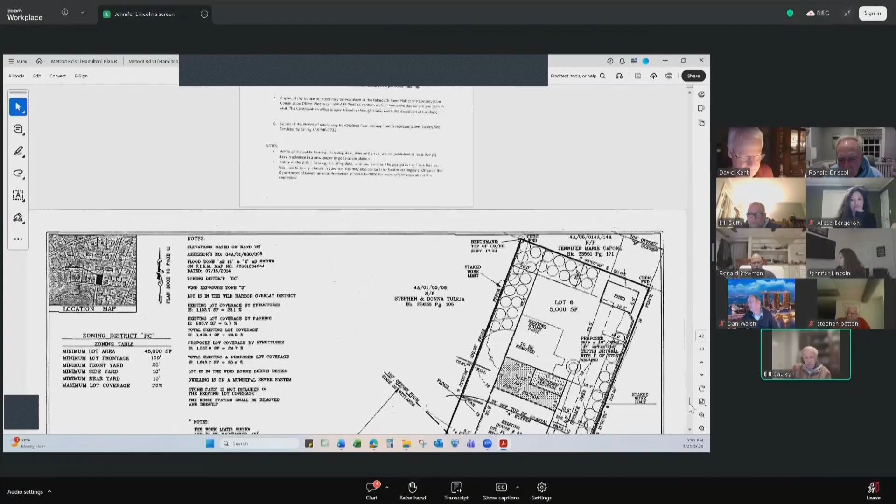Also, as far as the proposed addition, it's 77 square feet that we allowed 2-to-1 mitigation on because it's in buffer B. So a total of mitigation was 1,090 square feet that we proposed. The only place we could put it was along the east side because we still have to maintain 10 feet from the house. So we put the mitigation along the east side of the lot and then onto the northern and western area of the lot.

We added dry wells in to capture water runoff because currently it just drains down. So the feeling is by adding in the dry wells to capture all the roof runoff, we're actually helping the lot in the sense that now it won't adversely impact the salt marsh across the street from any type of runoff. We're capturing it all.

I believe we've addressed all the major issues as far as this project is concerned. It was brought up that we have changed some plans, so we'll provide another mitigation plan. But I believe we've addressed all the issues that need to be. Thank you.

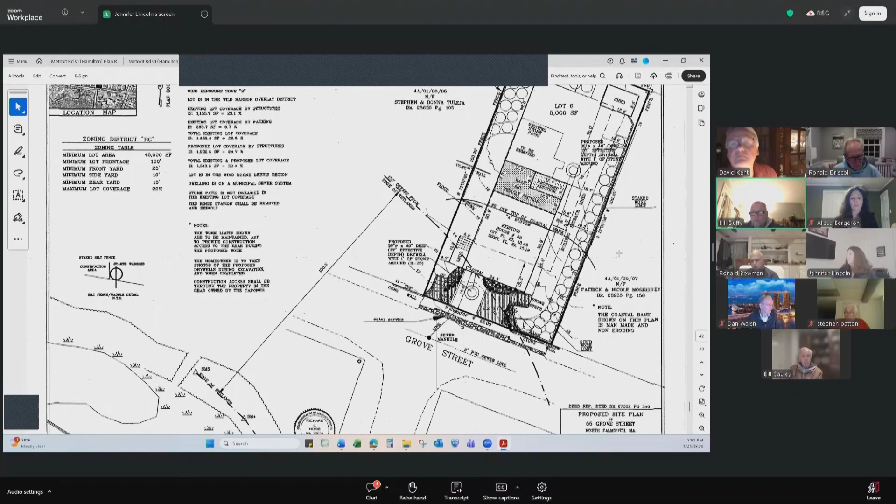Thank you, Mr. Cauley. Any questions? Jen, I think you can stop sharing. Perfect.

Any comments? Only that we want to switch out some of the mitigation for grasses, not shrubs. Correct, yeah, the three you mentioned: aster, goldenrod, and blue stem. Yep, we'll switch those out. We'll work with Bill to switch up his plan, but other than that, I don't believe we have any additional concerns. Perfect. Alyssa, anything from you?

Perfect, all right, commissioner comments. Ronnie, any questions? No. Ron? No, I'm all set. If we're all set with the plantings, it's a tight spot, there's not much you can do. Good to work it out.

Thanks, that's all. Steve? Steve, you're muted, Steve, you're muted. I don't have any questions. Thank you very much. Alrighty. Dave? I'm all set, thanks.

Dan? I only have one. I think I read in the really lengthy description of the project that the mitigation was only going to be managed for one season. I thought we were trying to do multiple seasons on things, unless it's already been addressed in other discussions. I think that's what it says in the document.

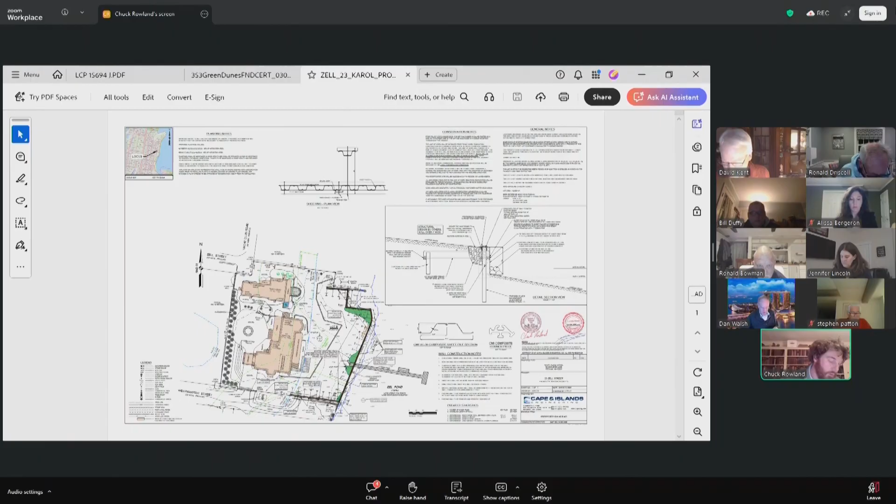I believe I have before you a fairly simple project, and as I talk about it, I'll be zooming in on different parts of the plan. The proposed project includes the reconstruction and maintenance of the existing stone and concrete bulkhead seawall with a vinyl sheeting seawall, as well as the expansion of the bulkhead along the southern extent of the property.

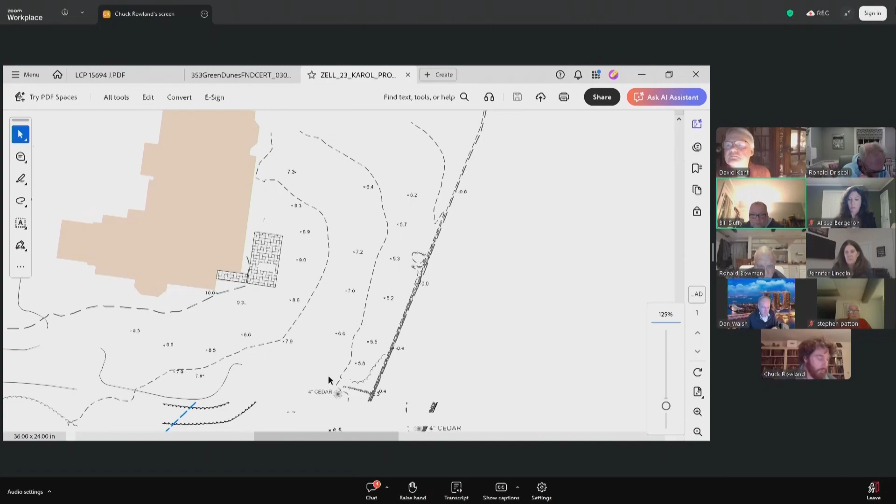And zoom in to show that. So this is the 72-foot return along the southern extent of the property.

The existing wall currently serves as a structural bank and provides critical erosion control and storm damage protection for the property. The bulkhead is showing signs of deterioration and failure, and to prevent the structural failure of the wall and protect the property from the effects of storm damage, the wall needs to be replaced before it experiences total failure.

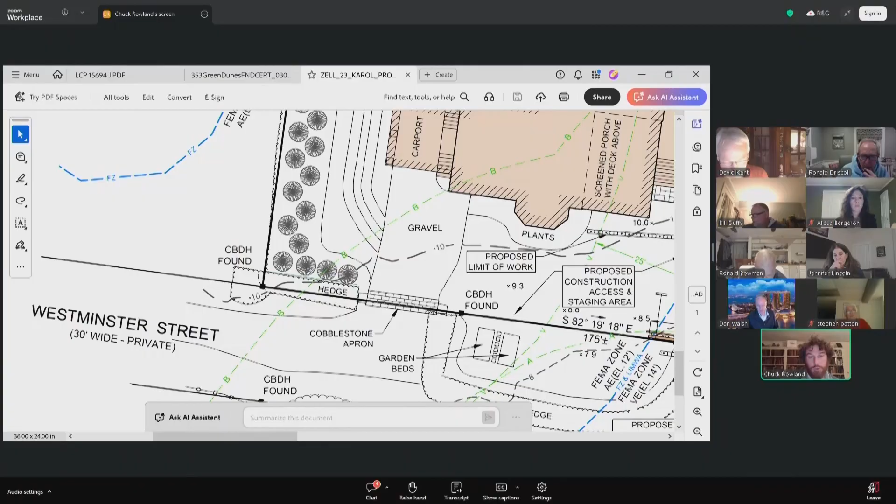All the proposed work will take place from the landward side of the seawall within the work limits. I've provided a work limit down Westminster Street through our property using the existing curb cut, and I've provided a work limit to limit the expansion of construction from expanding too far onto the property. We'll be using this for staging and construction access for all the work.

The concrete and stone wall will be removed in sections and methodically removed with an excavator. Care will be taken when removing the sections of the concrete to minimize any disturbance to the resource areas. The vinyl wall and dead men will be placed in the same footprint as the existing stone and concrete, except for the southern expansion, and will be driven into the ground with a vibratory hammer.

The existing bulkhead not only serves as a structural bank that provides erosion protection for the adjacent resources, it is assumed the bulkhead has not been replaced since it was constructed in the 1980s, and the structure will be built mostly in the same location except for the southerly extent.

And the wall is generally being replaced at the same height. As I said before, all the work will be done from the landward side of the property. At no point will construction activities or material storage occur on the seaward side of the wall. Access would be through the driveway, as I said.

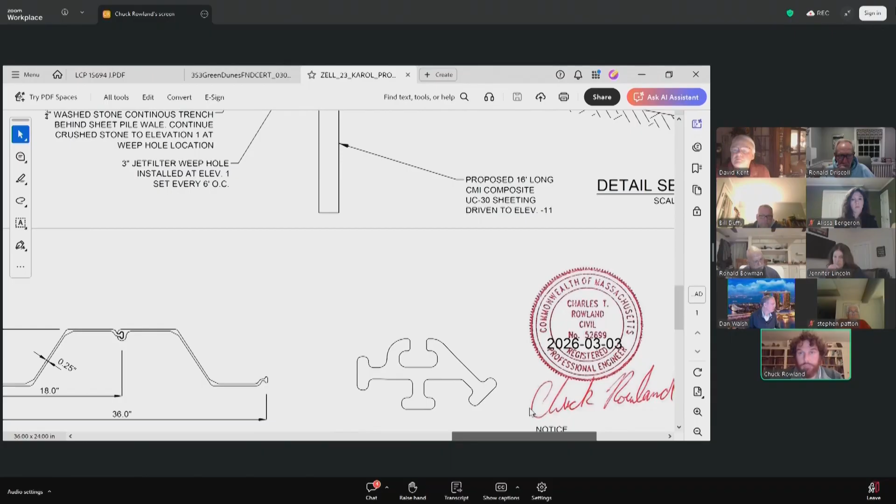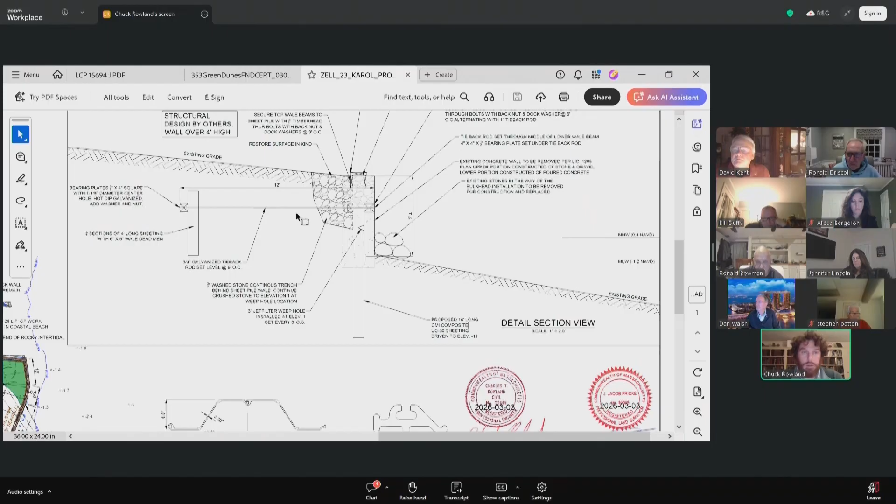I'll just run over the cross-section detail. I actually have a typo in the narrative - it's not vinyl, it's composite, which is a much stronger sheet. So I've shown the sheets to be driven or vibrated in after the existing wall has been removed. We're showing tiebacks that come back 12 feet.

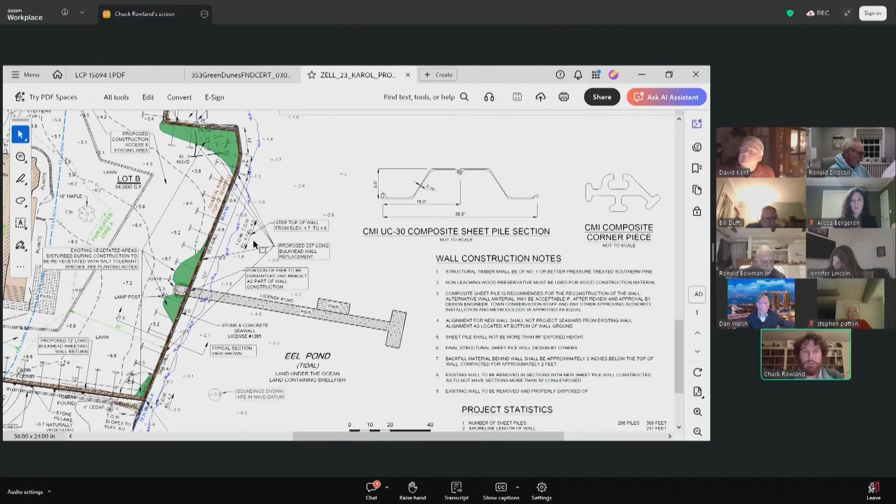We think this wall is going to be a much better option than the existing stone and concrete. Generally, stone and concrete nowadays really can't be constructed efficiently, and I have yet to find a contractor that's willing to install it and warranty the work.

I can run over some of the concerns that the staff came up with. Aerial photos show the vessel storage on the coastal beach. This can no longer be stored in the resource area - we're fine with that. Staff recommends the Rugosa Rose be reinstalled on site.

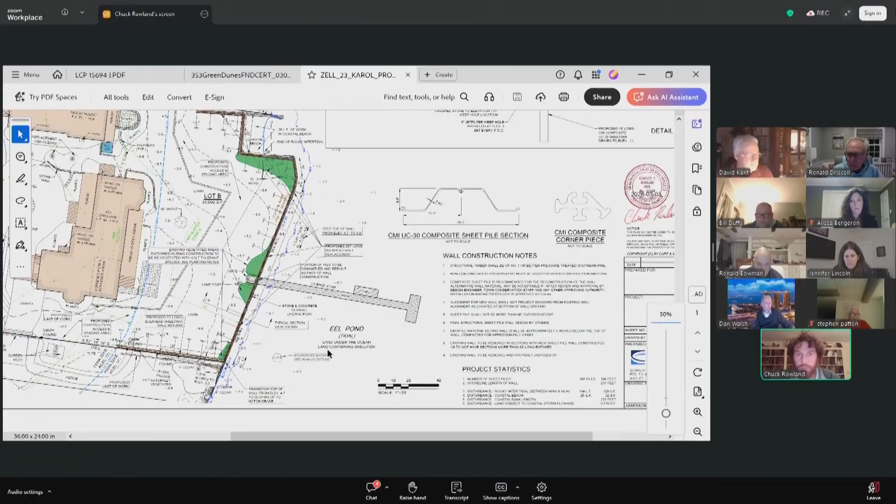Also, the restoration areas can be reconfigured in Zone A. If preferred, staff can review planting areas on an updated survey. Obviously, we'll be okay with staff's recommendations for plants in those areas that I've marked. I think I stuck with beach plum and another saltwater tolerant one, but we're happy with whatever staff recommends.

As for the gravel driveway, it's commented that there was an alteration in about 2017, and this can be approved after the fact, given the area is solely located in the AE flood zone. I'm assuming that means it's getting approved under this filing, but I guess Jen or Alissa can comment on that.

And then the big comment is how the removal of the existing wall is going to impact the integrity of the wall portion to remain in the road layout. And I can actually go over that real quick.

After this comment, and I think it's a very good question, my understanding was that it is a structural standalone wall, and that's a hard analysis to come up with without doing something like ground penetrating radar to figure out what kind of wall it is. Even then, it's hard to say what the integrity of the concrete and stone is in that area.

There is a return that we showed here on our survey, and I actually took a photo of it. It's hard to say how that is tied in or the structural capacity of that return.

So one of the thoughts I had is that we would send a tieback in around this area of the cedar. We'd have to get a small machine in here to dig this area out, and then we could drill a 2-inch hole through the concrete wall and put a large steel plate on the seaward side of the wall and tighten it all up with a turnbuckle. That'll ensure that this end of the wall will be stable.

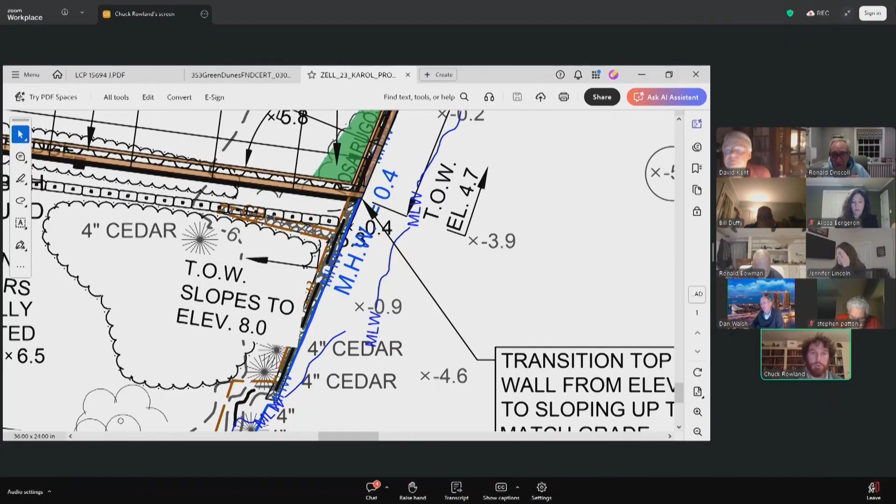My suggestion would be to place it on the southerly side of this return so we don't have to disturb it. Obviously this will add disturbance to this native area, but we're happy to revegetate it afterwards if that's what you guys agree would be the best solution. So with that, I'm happy to take any questions.

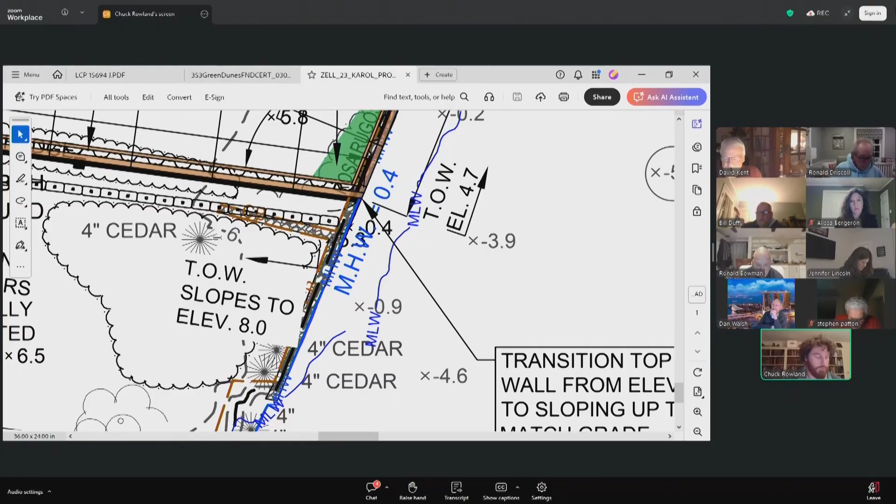Thank you, Jen. So I think I missed that second return. Chuck, are you going to have to remove all those cedars to do that? Yeah, definitely some of those cedars would have to come out. That's work that's in the road layout. Yes, ma'am.

We could come up with a different solution to try to come up with a tieback that's all in the road layout. Alissa had mentioned that, and I thought you guys said you could be okay with it if it's in the road layout, as long as it's in our half of the road, because I believe it's a private road, so we own the fee to the middle of the road, but we don't own the road. That's my understanding. If you'd like us to come up with a solution running closer to the existing return, we can try.

We can try to work on coming up with a little less impactful way of supporting that corner. I just don't want to see all those trees go, that's all. I think that's fair.

I think it's time to upgrade my computer. It's a little slow these days.

So there's a bound here. There's a bound there. There's a bound right there.

No, this one's right on the water. And then I believe there's one in the middle here, which I believe either we installed or somebody installed to show the middle of the road. And then I think there might be one on the far side of the road.

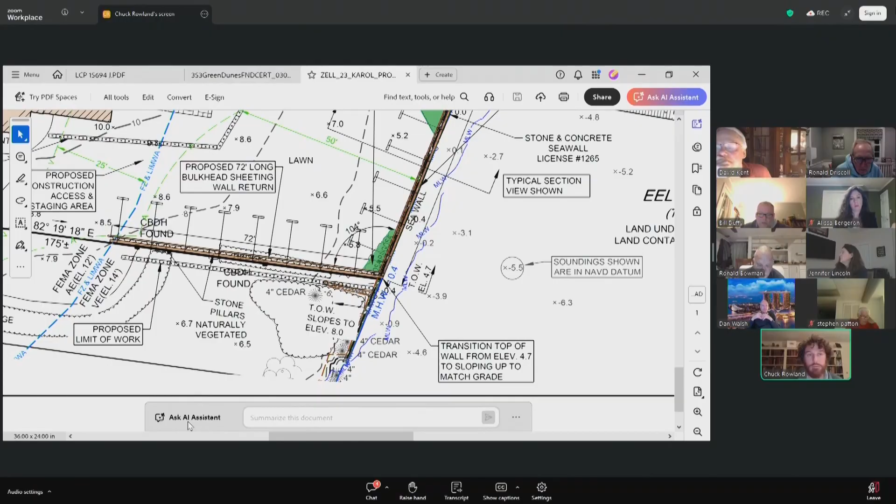So their property line is to the left of the bound, is what you told me. So they just have an easement there? So this is actually a physical road, okay. Yeah, that's Westminster. It's a private road, and it's no longer developed. It wasn't developed after our driveway.

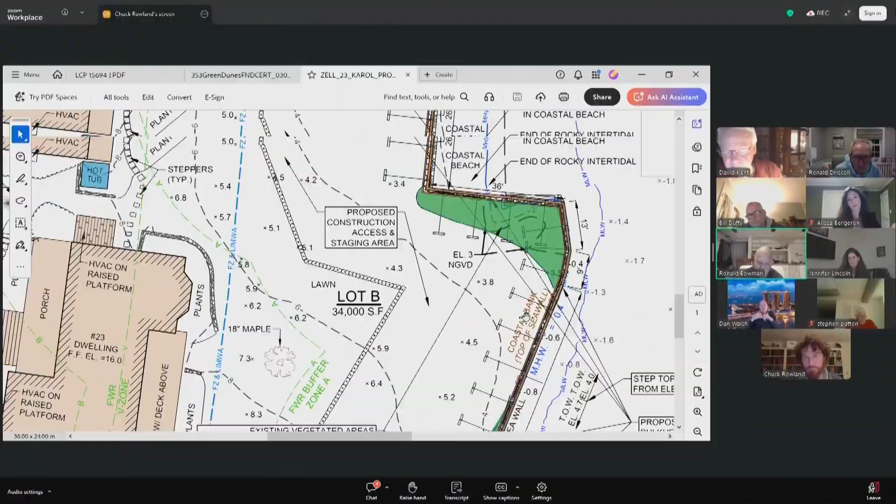Okay, most of my other questions are answered. A question I had on the north end - you have that finger that comes out that separates where the swing set is. So you're not doing anything with that one. It looked like the end of it was deteriorating a little bit.

So I actually went there and I saw this wall. That wall looks like it's a lot more modern, and I don't think it's holding up a lot behind it. It said 1930-something on the end of the wall. So are you talking about this wall or the finger that comes out? Yeah, right there.

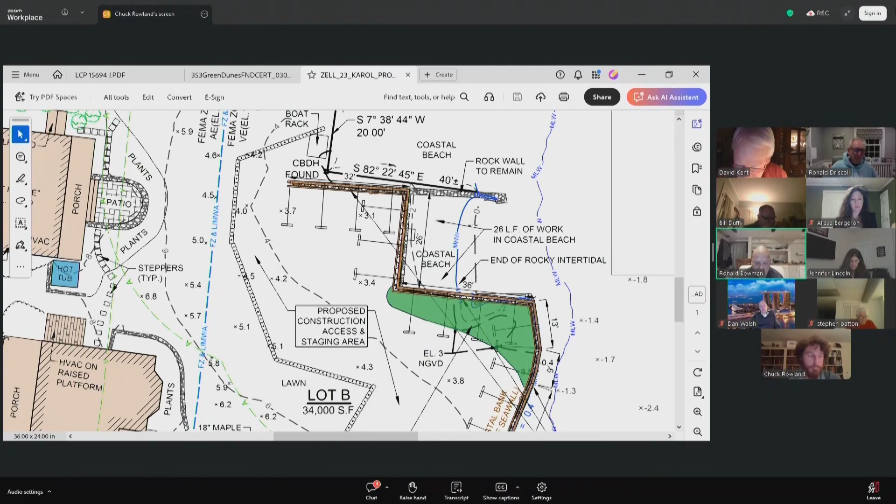We weren't really worried about that wall, but I was just curious. Why are you going through all this? I didn't know. Okay, I'm good. Thank you, I don't have anything. I've heard enough from everybody else.

Jen, any comments? I know there was an email that wanted to be part of the record for this property. Yes, I've received four emails since this project started, I think that's just because I put my email address in the chat. I do see someone's hand raised, but I'll start with the chat that was put in, from Elisa Gregory Bass. It's in relation to what year the wall was built, and it says it was first built in 1938.

Second, the gentleman that asked if he could send the email has his hand raised, so may I promote him to a panelist so he can ask his questions? Go ahead, thank you. I'll promote him to a panelist. Mr. Roth, I'm promoting you to a panelist. You'll need to come on.

Looks like his audio is trying to connect. Mr. Roth, are you there? Here he is, yep, there you are. Okay, so you're on mute, bottom left-hand corner, sir. Okay, here, can we hear? There you go, there we go, sir.

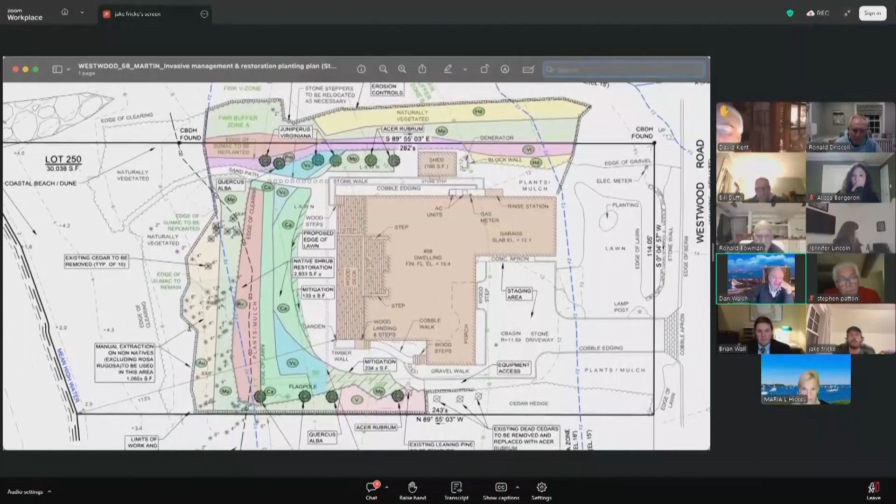So in the back, can you explain the colors and what the difference is? Is the red the area that you want to do all the removal on in the back? So see the blue line? That's a yes or no question. Is the red the area you want to do removal on? No. Okay, where is it then?

The area, so the machine sits on the back lawn. If you see where the green band closest to the house - that's where the machine sits. The machine only reaches in as far as the blue line is. See that blue hash line? Okay, got it. And actually, Jake outlined it where it says.

And how much depth are you guys trying to remove of the soil out of that? So I'm going to go down as far as we find roots. The site we were on today, we went down 2 feet. Sometimes we only have to go a foot down. But no matter what we go down and take out, we replace, so the grade and elevation does not change, and whatever gets taken out gets replanted. I don't want anyone to feel like we're stripping a site and not putting natives back in. We're putting in trees, we're putting in shrubs. Yeah, I think we got that part. Okay, I was just trying to figure out how much damage was going to be done back there.

I got it, Mr. Chairman - technically not in the dune. May I interject briefly here? I think that was an excellent question. When I gave the presentation and when Maria gave hers, we kind of picked up where we left off last time. But there have been significant changes to the plan, and Jake has got it up there now. Going from the ocean side, the west side moving east, one of the things we did was we pulled the limit of work back extensively compared to the last plan.

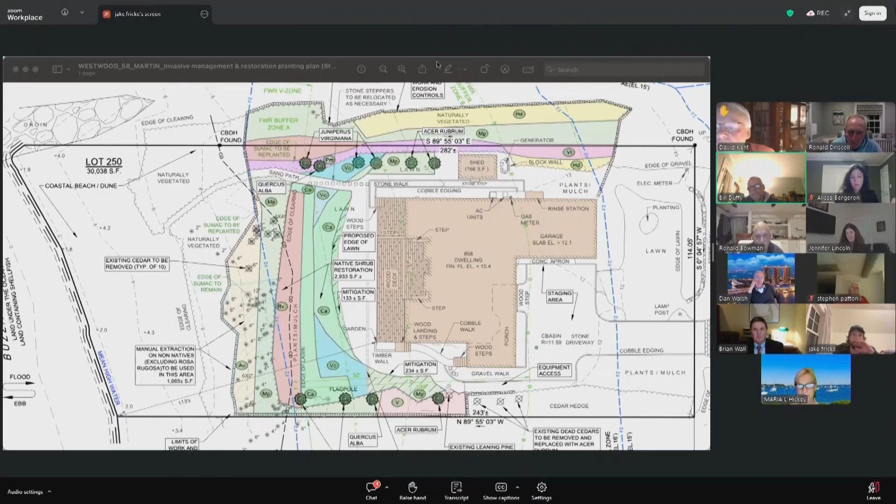Thank you for the presentations, one and all. I believe we've been compromising on the area to be mechanically harvested, so to speak—is that correct? What do you mean by compromising? We started at one point and we're at a point where not as much is going to be mechanically harvested. Right. Jen? Correct. Thank you, okay.

It sounds like a reasonable approach, I gotta say. Thanks, Dan, although not on the quorum, it helped me understand a little bit more about the delineation of the area to be mechanically dealt with.

All right, Ronnie? Thank you all, and thank you, Maria, for that presentation. I think it was similar to what you did earlier.

Something definitely has to be done with those invasives. If you had to do manual for three years, are you going to guarantee that's not going to come back right away? I can't—it's gonna come back. That was my whole point. And I want to do it once and do it right. Okay, that's the only question I have, thank you.

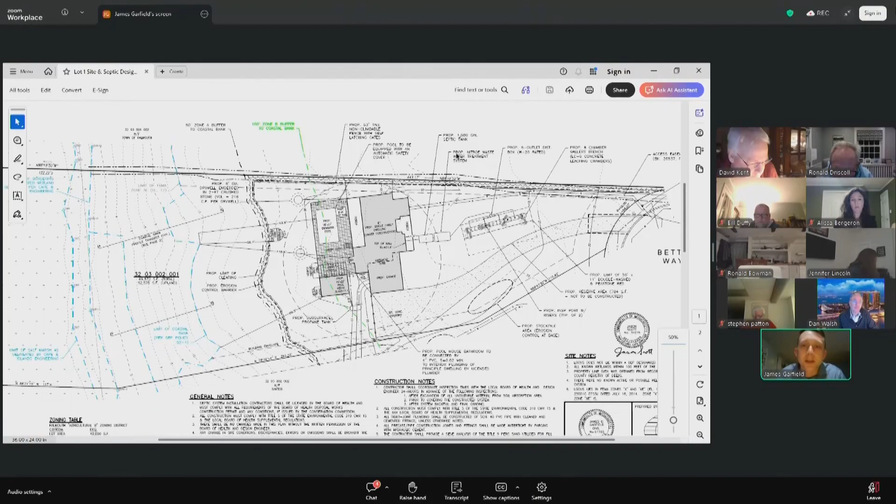We are not proposing any work within the 50-foot Zone A buffer. We're not proposing a new limit of work line; the limit of work will match the previously approved plan. We believe these changes to be minor in nature, and we did receive one comment from staff that the patio and fireplace we proposed in the rear yard, shown at 58.7 feet from the coastal bank, staff has noted will have to be bumped up to at least 60 feet. I believe that's a local regulation requiring a structure to be at least 60 feet from a coastal bank. So we're amenable to that, and we can certainly add that as a condition of approval if the commission wishes. With that, I'll turn it back to you for questions.

Thank you, Mr. Garfield. Jen? Yep, that was our only concern, Mr. Chairman, so I'm all set. Thank you, Mr. Garfield. Alyssa, anything to add? Not at this time. Perfect. Any questions from any of the commissioners? I'll start with you, Steve. No, thank you. Dave? I'm all set.